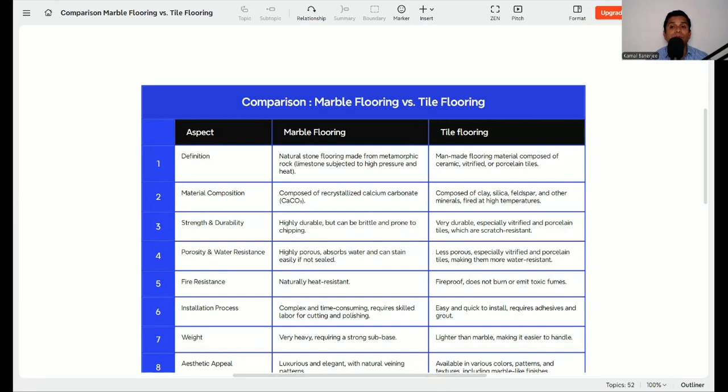Without wasting time, let's jump into the subject: the comparison between marble and tiles for flooring. Both marble and tiles are used as flooring finishing materials, and both have their own limitations and advantages, and their own area of use. Neither is marble bad nor tiles bad, or marble good and tiles bad - it's not like that. Both have their own limitations, advantages, and area of use. But we need to know the criteria to select what is good for our project.

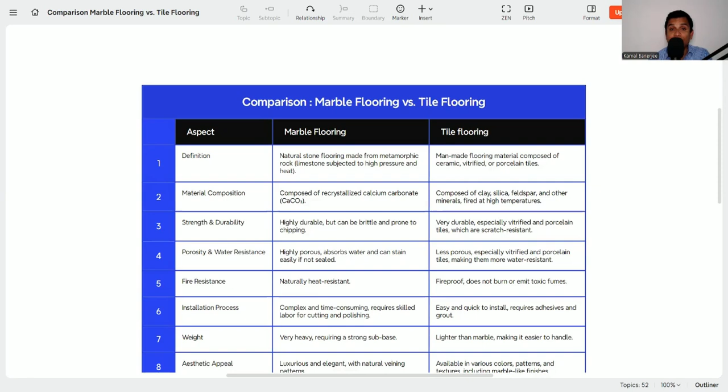So let's break it down one by one. First, what is the definition? Marble is natural stone flooring made from metamorphic rock, either limestone subject to high pressure and heat. It is derived from metamorphic rock, meaning it's a natural source material from a chunk or slab, which we shape as per our requirement.

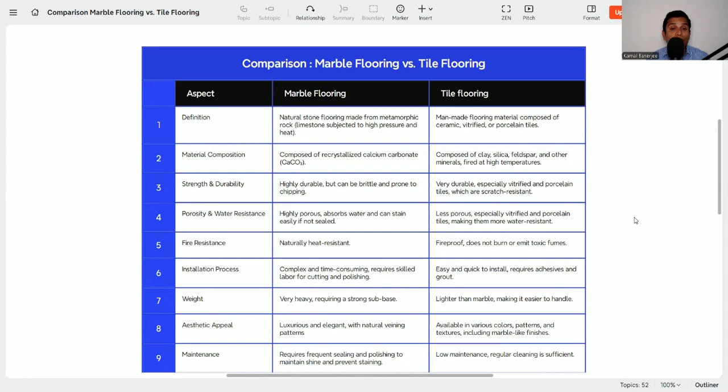On the other hand, what is tile? It is man-made. So marble is natural, and tiles are man-made - a flooring material composed of ceramic, vitrified, or porcelain tiles. There are different types: ceramic tiles, porcelain tiles, and vitrified tiles. So the first difference is that marble is natural stone, and tiles are man-made stone.

Next, what is the material composition? Marble is composed of recrystallized calcium carbonate - basically calcium carbonate in a different crystallized form. But what is the tiles' composition? It's composed of clay, silica, feldspar, and other minerals fired at a high temperature.

Now, what about strength and durability? Whenever we select material for flooring, we need to think about strength and durability for the long term. Marble is highly durable but can be brittle and prone to chipping. Tiles, on the other hand, are very durable, especially vitrified and porcelain tiles, which are scratch resistant. New tile innovations in the construction industry have produced scratch-free tiles with high durability. But marble, being a natural stone, can scratch easily.

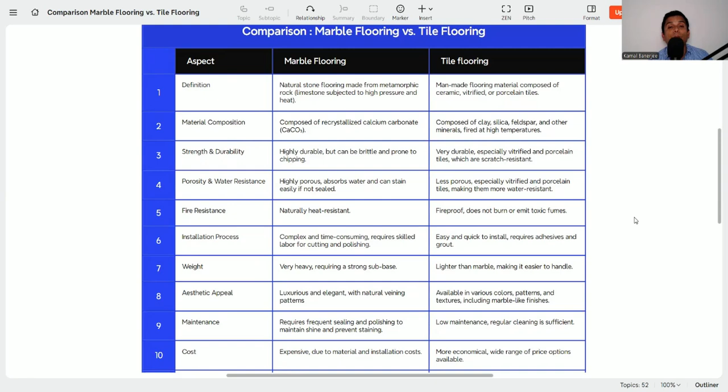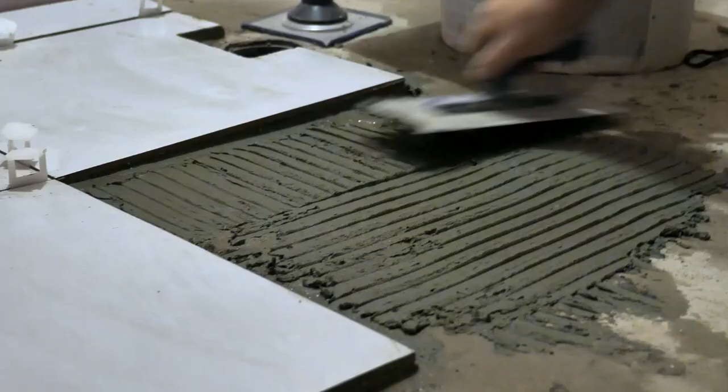Another point is porosity and water resistance. If a material has high porosity and high water absorption, the flooring can be damaged, or damp spots can appear - so you need to choose a material suitable for you accordingly. What is the porosity and water resistance of marble? It is highly porous, absorbs water, and can stain easily if not sealed, since it is a natural stone.

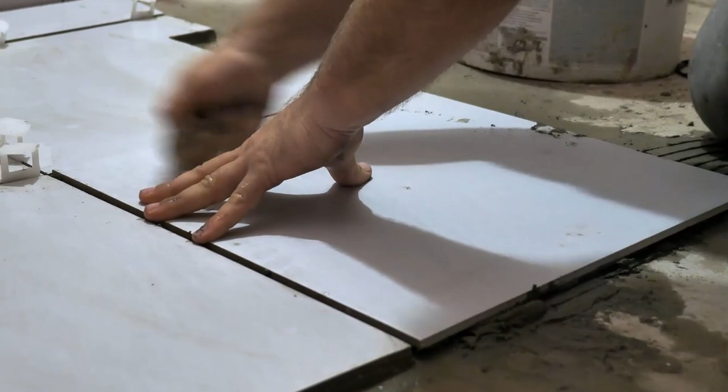That is why whenever you are dealing with natural stone, you need to be very cautious, careful for maintenance and application, because it's porous and can absorb water. That is why it needs to be sealed properly to make it waterproof. But tiles, especially vitrified and porcelain tiles, are less porous, making them more water resistant. So from the water resistance point of view, you can choose tiles over marble. But if it's in a dry area and you need elegant looks, you can go for marble.

Another criteria is fire resistance. In the modern age, fire can break the building, so you need to make your envelope or building fireproof. Marble is a natural stone, so it is naturally heat resistant. But tiles are man-made, fireproof, and do not burn or emit toxic fumes. So from the fire point of view also, you can choose tiles.

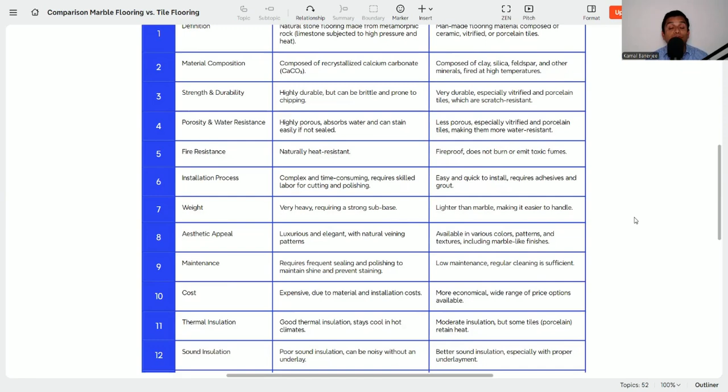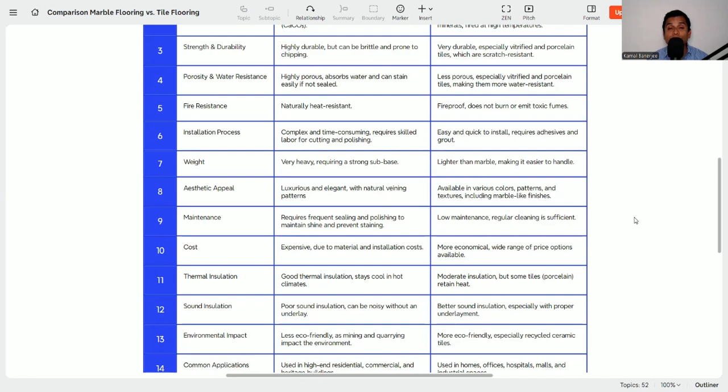What is the installation process we need to know, because it's only if you install properly that aesthetic views or long-term durability can be achieved. In case of marble, it's complex and time consuming because it's a natural stone and requires skilled labor for cutting and polishing, in order to get the look you want. So installation for marble is complex. Tiles, on the other hand, are easy and quick to install, requiring just adhesive and grout. If your criteria is simplicity, go for tiles. But if you need elegant looks, marble always has better aesthetic appeal.

Marble is very heavy, being a natural stone, requiring a strong sub base. If the sub base is not strong, the flooring cannot achieve high durability or strength. Tiles, on the other hand, are lighter material than marble, making them easier to handle and transport from one place to another, and they are more break-free. Marble, being natural stone, can break easily. So transportation is also a criteria when selecting material.

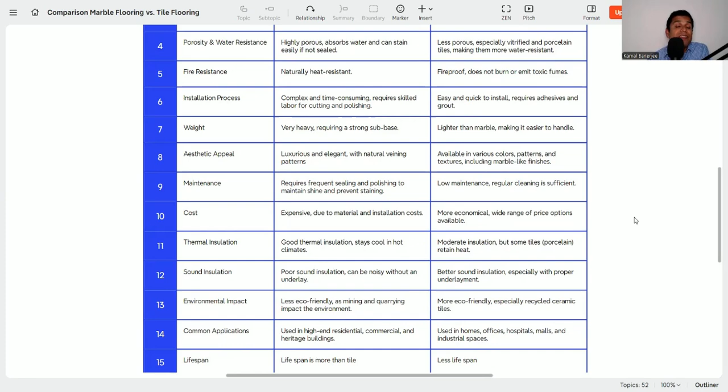Then aesthetic appeal is most important - marble is luxurious and elegant with natural veins and patterns, giving a wide range of varieties. If your property or project needs a luxurious look, marble is always the better choice. Tiles, on the other hand, are available in various colors, patterns and textures, including marble-like finishes, but they won't give the elegant and luxurious look of marble. So if your requirement is a huge luxurious and elegant look, go for marble.

Then maintenance - marble requires frequent sealing and polishing to maintain shine and prevent staining, needing regular or periodic maintenance including polishing, shining and sealing the grout to keep it durable. Tiles, on the other hand, are low maintenance, and regular cleaning is sufficient while still giving long lifespan and durability.

And the cost - marble is always expensive due to material and installation cost. Tiles, on the other hand, are more economical, with a wide range of price options available, so whatever your budget, tiles can fit it. But marble is not that easy because it requires highly costly materials, being expensive due to material and installation cost.

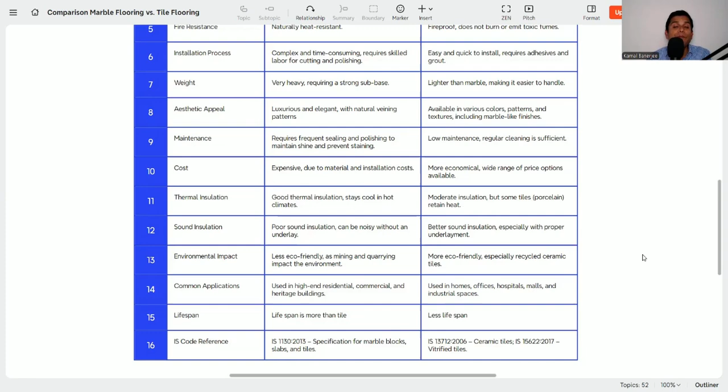Then environmental impact, which we have to think about whenever selecting any product for our project, because we have only one mother earth. It is our duty to protect our earth, so you need to choose materials with environmental sustainability. In case of marble, it is less eco-friendly as its mining and quarrying impact the environment, because it's a natural source we are extracting, which can affect environmental sustainability.

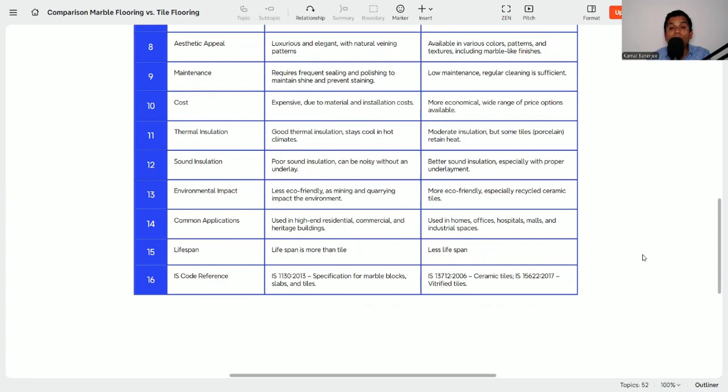But on the other hand, tiles are more eco-friendly, especially recycled ceramic tiles, which we can recycle. That is why tiles are better for sustainability.

Then common application: marble is used in high-end residential, commercial and heritage buildings, as it has that appeal. On the other hand, tiles are used in homes, offices, hospitals, malls and industrial places, because they fit any budget and are easy to maintain, load and unload, so they can fit anywhere. But for high-end residential, commercial or heritage building projects, marble always has the edge over tiles.

And what about lifespan? Marble's lifespan is more than tile. Tile has a shorter lifespan compared to marble.

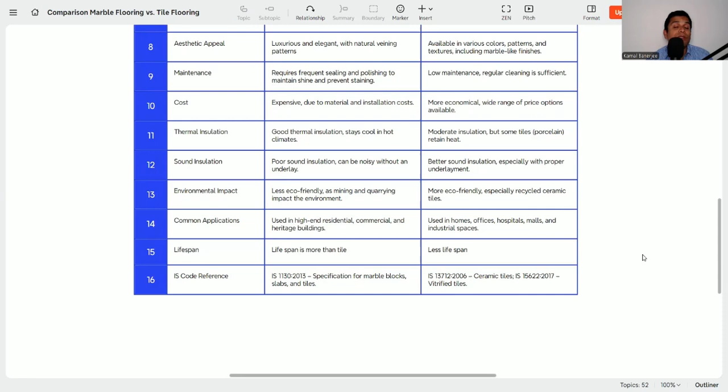And what is the IS code? Because whenever we are working in India, we need to know the IS code for any work. For marble, we have IS 1130:2013, specification for marble blocks, slabs, and tiles. And for tiles, we have two codes: IS 13712:2006 for ceramic tiles, and IS 15622:2017 for vitrified tiles. So these are the comparisons between marble and tiles.

I hope you find this useful. But neither marble is good nor tiles are good, or marble is bad and tiles are bad - it's not like that. Both have their own limitations, both have their own advantages, both have their own area of application and budget. So according to your budget and project specification, you need to find out which one is suitable for you. Whatever criteria and properties I have discussed, you need to check one by one, and accordingly finalize which material is right for your project.